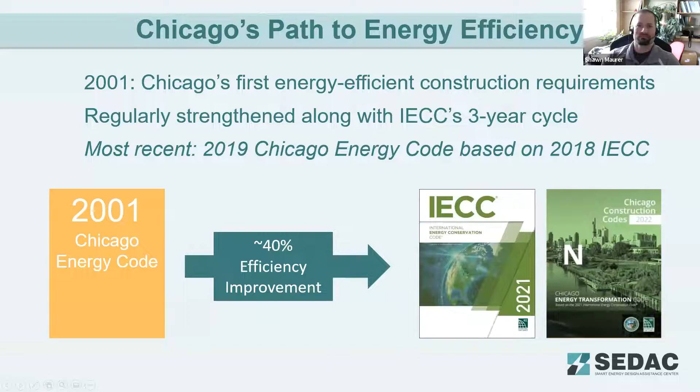The advancements of the codes help support Chicago's energy and climate commitments. It follows the Climate Crisis Resolution from February 2022 and the Chicago Climate Action Plan. The goal for the state is to reduce overall carbon footprint and emissions by 62% from 2017 levels. Energy codes are a good way to help ensure that new buildings constructed and existing buildings renovated are reducing their energy consumption as much as possible.

So why the update from the Chicago Energy Conservation Code, as it was in the last cycle, to now the Transformation Code? The key thing is that Chicago is looking forward towards electrification and application of renewable energy technologies to buildings to help offset carbon emissions. So energy efficiency plus clean energy equals energy transformation, and that's why in the current code cycle it's been renamed the Chicago Energy Transformation Code.

Here at SEDAC, we like to recommend to everyone that first you've got to conserve, then you apply renewables to your projects. If you don't conserve energy first, you're going to spend a lot more money on renewables and consume more resources to provide those renewables to buildings. So conserve first, get your energy consumption as low as possible, and then start applying renewable energy technologies to those facilities.

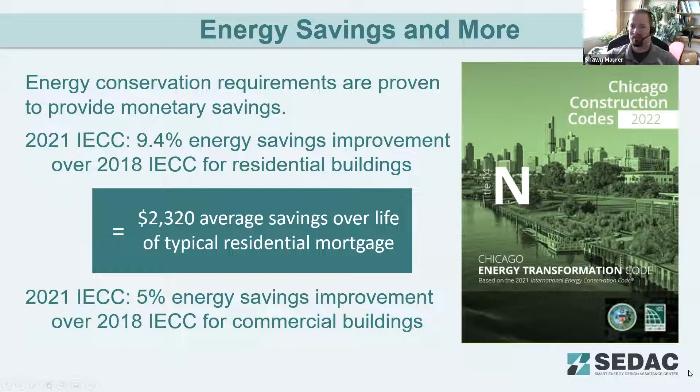Before we move on to talk about the commercial provisions, we have a quick Q&A poll. Our first question: what is the target carbon reduction from 2017 levels in the Chicago Climate Action Plan? Is it 41%, 55%, 62%, or 74%? And then, how much has the Chicago Energy Code improved since the 2001 Chicago Energy Code? Is it about 20%, 40%, 50%, or 60%?

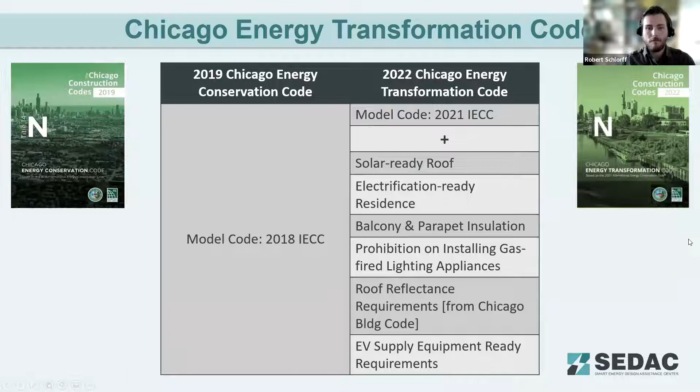A little bit more about the model code: the 2021 International Energy Conservation Code is being adopted as the model code without any weakening amendments. There are additional requirements, as I just mentioned, as well as a couple additional pathways.

First, there are a couple additional compliance pathways allowed within the Chicago Transformation Code: Passive House Institute certification, as well as National Green Building Standards certification. If your project complies and receives certification through either of those entities, you have no other additional requirements through the Chicago Energy Transformation Code.

Your building complies. As mentioned earlier, there is a ban on new gas lighting specifically - it does not have any effect on existing gas lighting, but is a ban on any new gas lighting. The reason is that gas-fired lighting fixtures produce a significant amount of waste heat, as well as exhaust fumes and direct emissions, so we want to not allow those devices to be installed anymore.

There are also additional thermal break requirements for balconies and parapets, electrification ready requirements, and solar ready roof requirements that should make new buildings within Chicago more prepared for the transition to renewable energy. As Shawn was mentioning earlier, as we continue to push the national grid towards more renewable energy, these requirements should help prepare new buildings within the Chicago area for that transition, make it easier, and make it more cost effective in the future.

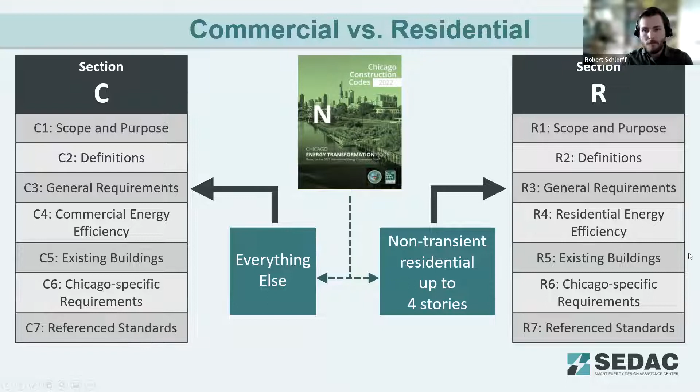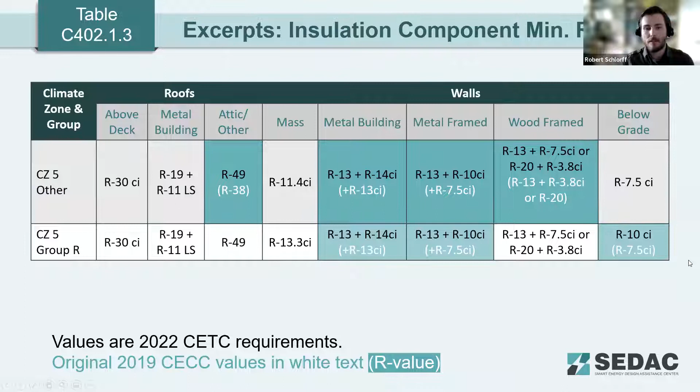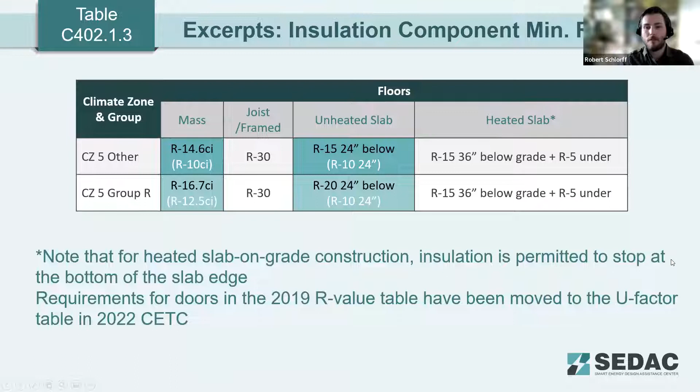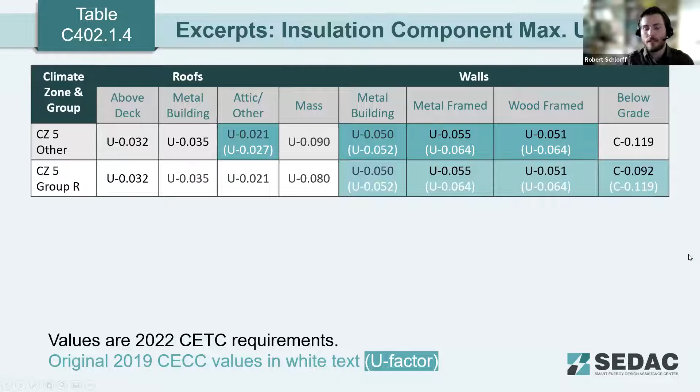Moving on to the U factor tables, again we've pulled out the requirements for roofs and walls in climate zone 5. And again, we have improvements in these U factor requirements that mirror the improvements within the R value table. Same noting system goes here, where green highlights represent where values have been improved, and the white text represents the original 2019 Conservation Code values.

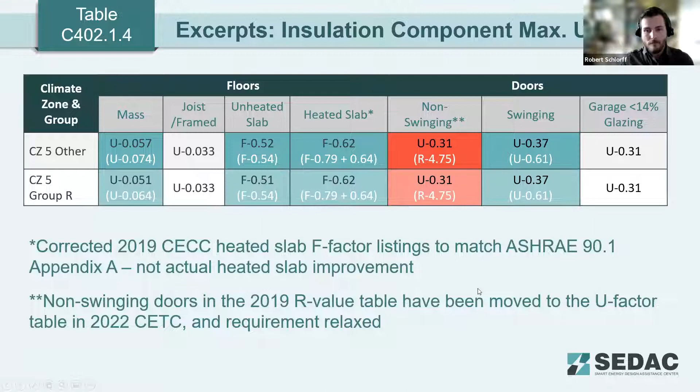So moving on to balconies and parapets. As I mentioned earlier, there has been a new requirement added onto the model code for the Chicago Transformation Code to limit thermal bridging through balconies and parapets. This applies to new construction with any exterior balconies or parapets that interrupt the building thermal envelope.

Now these can be dealt with in two ways. The first way is to install continuous insulation around either the balcony or the parapet. The R value of that continuous insulation must be equal to the adjacent wall that it is interrupting. If the balcony interrupts more than one type of exterior wall with different R values or insulation levels, the balcony continuous insulation must equal the higher R value of the adjacent wall being interrupted.

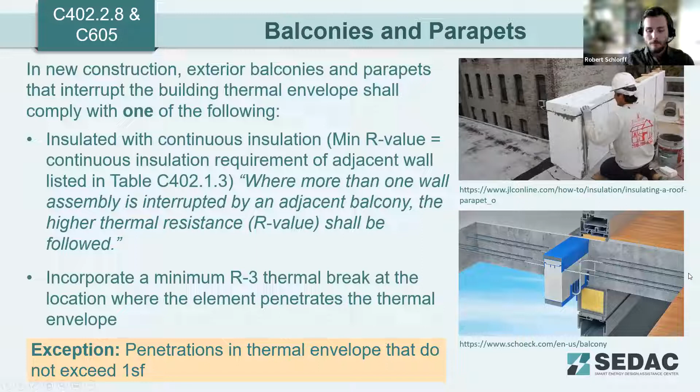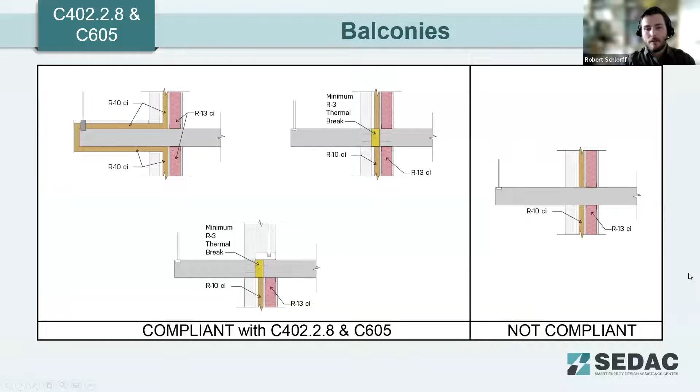Here we've drawn and isolated some balcony details that show compliant details on the left and a non-compliant detail on the right. As you can see, it needs to be either continuously wrapped in insulation, as the option in the upper left, or applying a thermal break, as in the other two compliant options there.

We'd like to point out that even in a continuously insulated parapet, there's a risk of condensation within that parapet assembly. This is primarily due to improper or faulty air sealing details at the bottom of the parapet that would allow interior conditioned air to infiltrate that assembly.

Rise up into that parapet and cause condensation. So there are a couple ways you might be able to deal with that. You can either design or carefully consider your air sealing details at the base of the parapet to make sure that air intrusion into that assembly is not an issue.

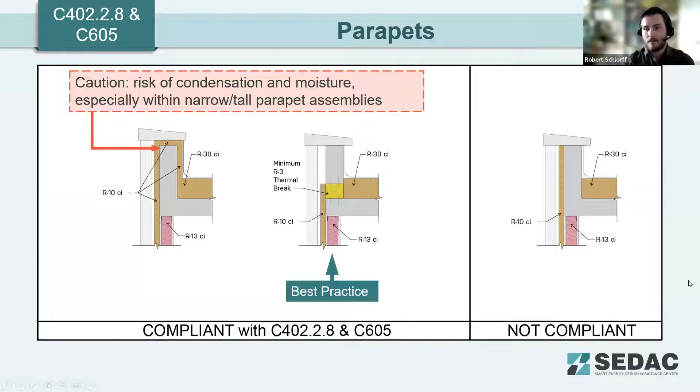Although there's a good argument that if you're going to that much trouble trying to keep air from entering that parapet assembly, you might as well just install and detail a thermal break. So there are two options there, but we want to point out there could be a risk of condensation, particularly with narrow and tall parapet assemblies where there's just not quite enough insulation to prevent condensation within that assembly when interior air can get in.

Moving on to thermal resistance of cold formed steel assemblies. The Chicago Energy Transformation Code has removed the effective R-values for steel stud wall assemblies table that is included in the 2021 Energy Conservation Code. This has been replaced with the American Iron and Steel Institute's S250 formulas for cold formed steel assemblies.

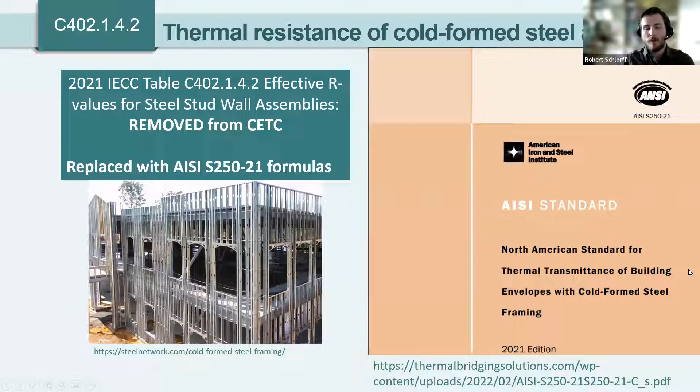How that works is the U-factors of exterior walls using cold formed steel members must be determined in accordance with S250 formulas. Any framing spacing can be used when continuous insulation satisfies the U-factor max with no cavity insulation. So if you're satisfying the minimum U-factor for your exterior walls with no cavity insulation, you don't need to worry about S250 formulas.

If your exterior walls are steel framed at 24 inches on center or 16 inches on center, you move to the next lowest spacing factors, as shown in that graphic to the right. For greater spacing than 24 or 16 inches on center, you'd use the S250 formulas without any modifications. And if you have a wall assembly using steel members that are non-standard, you'd use the S250 formula options for non-standard framing members.

The main reason behind this shift is to really drive home the impact of thermal bridging through steel stud assemblies. It's been shown over and over again, especially if you've seen thermal images of a steel stud assembly, that thermal bridging is a significant problem with that method of construction.

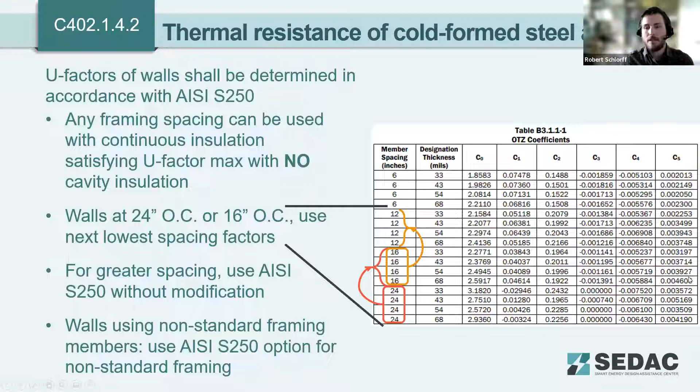These requirements are trying to limit the impact of thermal bridging through your exterior assemblies as much as possible. The hope is that this pushes a bit more toward continuous insulation, as the code value tables we showed previously are also doing, or pushes toward more advanced framing techniques that limit thermal bridging in other ways. But the main component is that we're trying to eliminate thermal bridging as much as possible through the assembly.

Moving on to fenestration, maximum U-factor, and solar heat gain coefficient requirements. There's not much difference here between the Chicago Transformation Code and the updated 2021 IECC code. They're pretty much in alignment. There's a little bit of improvement in the actual required U-factor and solar heat gain coefficient values.

But the main difference to keep in mind is that solar heat gain coefficient is no longer determined by orientation of that fenestration. It's now determined by whether or not that fenestration is fixed or operable. This requirement sacrifices some of the potential for cost-benefit trade-offs by using lower performing windows on the north side of a building, but it better accounts for the fact that operable fenestration generally has a much more difficult time with air sealing and being thermally broken than non-operable fenestration.

So the difference here is saying that if you have operable fenestration, your solar heat gain coefficient is going to be lower, because that operable window assembly is a little bit poorer in performance than a fixed window or fixed fenestration would be.

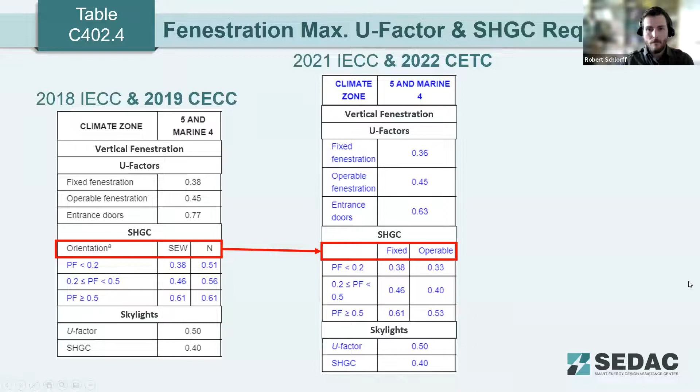As with the IECC, there is a pathway that would allow you to increase the amount of vertical fenestration on your building. Vertical fenestration can be increased to a maximum of 40% of the above grade wall area when the following requirements are met. For buildings with no more than 2 stories above grade, at least 50% of the net floor area has to be within a daylight zone. For buildings 3 stories or more above grade, at least 25% of the net floor area must be within a daylight zone. For both, daylight responsive controls must be installed within the daylight zone.

Lastly, visible transmittance of vertical fenestration shall not be less than 1.1 times the solar heat gain coefficient. There is an exception, but it only applies to that fourth item about visible transmittance, and that exception applies to any fenestration outside the scope of NFRC 200. NFRC 200 is the standard for determining solar heat gain coefficient for windows, doors, skylights, and curtain walls. Any fenestration that does not use flat glazing cannot use NFRC 200 methods for determining solar heat gain coefficients. So essentially, fenestration such as domes, solar tubes, or other contoured glazing does not need to meet that fourth item visible transmittance requirement.

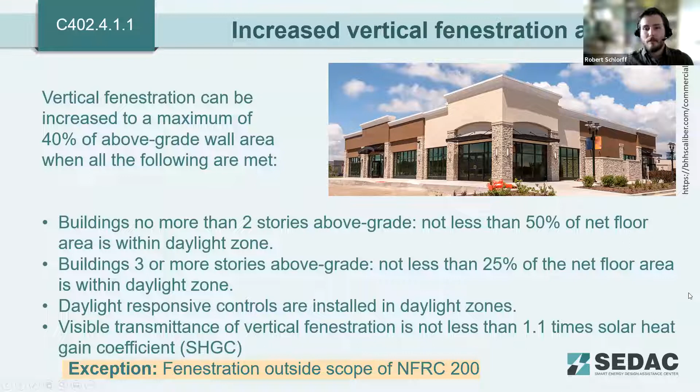One more requirement here for fenestration. This may be familiar to some of you who know the state energy code, and it's also a proposed amendment for the upcoming state energy code. This requirement is for buildings with more east and west fenestration than north-south fenestration. The essential idea is that the glazing on the east and west facades of such a building will have a slight penalty, meaning those windows need to be higher performing than the ones on the north and south sides.

The reason for this is that we want to do our best to compensate for the high heat gains we see on the east and west facades of a building. Especially morning and afternoon sunlight can be pretty harsh and hot depending on the time of year. So if a building has a significant amount of east and west glazing, this requirement is trying to account for that and make sure east and west glazing is a little higher performing, so you don't suffer from unwanted heat gains.

To determine if your project needs adjusted solar heat gain coefficients in this way, you follow the given formula: take the area of the west facade windows times the solar heat gain coefficient of the west facade windows, and that must be less than or equal to the total area of the fenestration around the building times the solar heat gain coefficient given in the code, divided by 5. What this formula breaks down to is essentially that east and west fenestration on a building would need to be about 20% improved over the base code minimum values for solar heat gain coefficient performance.

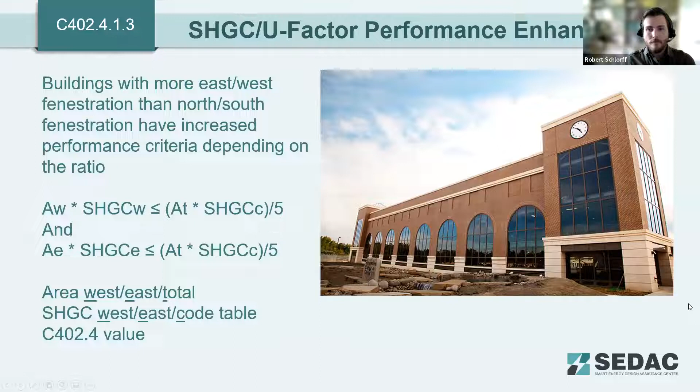Question 1: only balconies are required to have thermal breaks in the 2022 Chicago Energy Transformation Code, while parapets are optional. True or false? Question 2: how much does the east-west area weighted solar heat gain coefficient have to be reduced below the total code required area weighted solar heat gain coefficient to comply with the Transformation Code's Fenestration Performance Amendment?

We've had a few questions come in. Is there an ASHRAE compliance path for the Transformation Code? Yes, that's part of the 2021 model code. That hasn't been removed by the Chicago Amendment, so you can follow ASHRAE, or they've added in the Passive House and Green Building Standards compliance paths.

Since new buildings need to be solar ready due to the Transformation Code, what defines a building being solar ready? We'll get to that, yep, we are just about to get there.

Okay, looks like pretty much everybody has answered the poll here. I'm going to go ahead and end it. So it looks like pretty much everybody got the first question correct: balconies and parapets are both required to have thermal breaks or continuous insulation within the 2022 transformation code. And it looks like pretty much everybody got the second question right as well, that the east and west glazing needs to have about a 20% improvement over the base code minimum requirements.

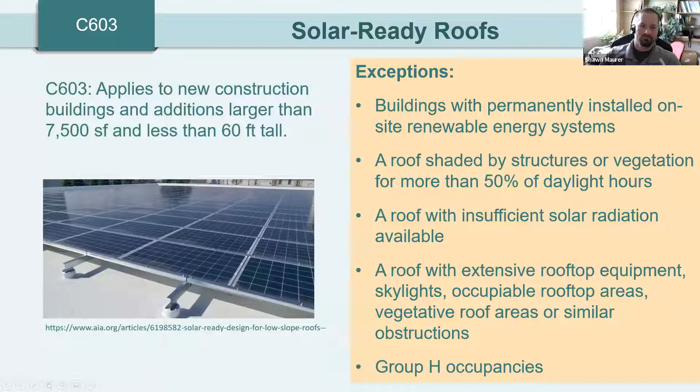So looking at the solar ready zone areas, how do we define a solar ready zone? It's the available roof area on a horizontally projected gross roof area, less any areas covered by other rooftop equipment like skylights, helipads, rooftop equipment, vegetative roof areas, things like that.

And have mandatory access or setback areas as required by Section 1204 of the Chicago Fire Prevention Code. So 40% of the available roof area must be made solar ready.

Looking at either a single large area of the roof or a number of separate subzones that total up to that 40% available area. Again, that narrowest dimension between subzones should not be less than 5 feet. That provides your access pathways, things like that.

If your available roof area is less than 2,000 square feet, again, you're not going to have an adequate amount of solar installed on that roof to offset building loads and be cost effective. And so there is an exception for roofs that have minimal available area.

Again, things that are going to be kind of limiting that available rooftop area: skylights, rooftop parking or helipads, occupiable vegetative roofs, rooftop gardens, mandatory access or setback areas.

And what we want to see for that solar readiness is that area of the roof is going to be indicated on the plans as these are the solar ready zones. This is how you're going to indicate your code compliance with the transformation code.

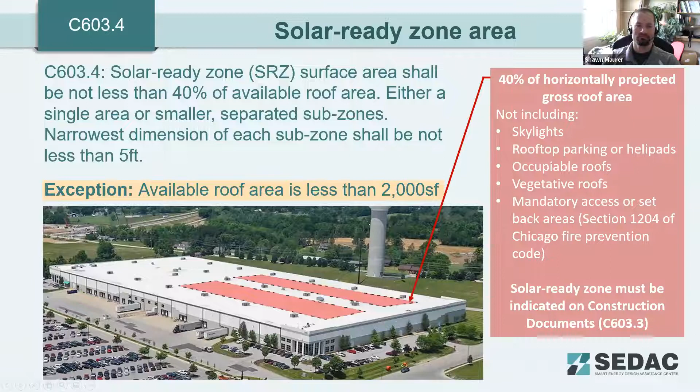Some additional requirements for solar ready roofs. Solar ready zone shall be free from obstructions such as pipes, vents, HVAC equipment, skylights, roof mounted equipment. You want a clear roof space where it's able to just install the panels quickly. It's readily available. That's why it's considered solar ready.

Rooftop loads must be documented and designed for the additional dead load of the panels on the building. So adding an additional 5 pounds per square foot or more in dead load allowance to the construction, again, makes that roof structurally prepared to accept those panels and have them installed.

And then in the construction documents, you'll have to indicate pathways for future conduit or piping, or design in empty conduit or whatever, so that those areas are ready for solar panels to be installed and have all the electrical components wired in and connected properly. And they don't have to have redesign of the building, moving things around in order to install that equipment.

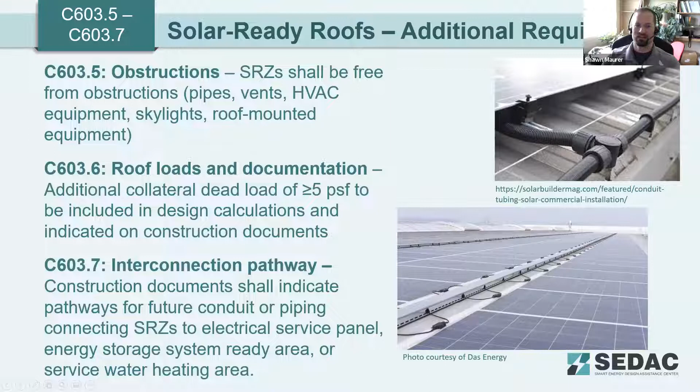We want these solar ready so that they're easy to install. It's minimizing that future cost of installing this equipment when the building occupants and owners are ready to install these panels.

As far as inside the building, if you're going to have energy storage systems for your structure, you're going to need an energy storage system ready area, minimum of 2 foot by 4 foot clear floor area for future energy storage. Again, fire prevention code is going to have some impact there, so refer to the appropriate sections as far as where to locate those energy storage systems.

For electrical service, you need to reserve space to put in the panels, circuitry, switch gears, all that related to using those solar panels. So you need to reserve space for the dual pole breakers for future solar system and energy storage systems, and label them appropriately so that, say you add some more equipment to the building, those empty slots aren't taken up and now you're not solar ready anymore.

And then a permanent certificate needs to be installed indicating how the building has been made solar ready and documenting, near the electrical panel or other approved location, these things have been installed to make the building ready for solar applications.

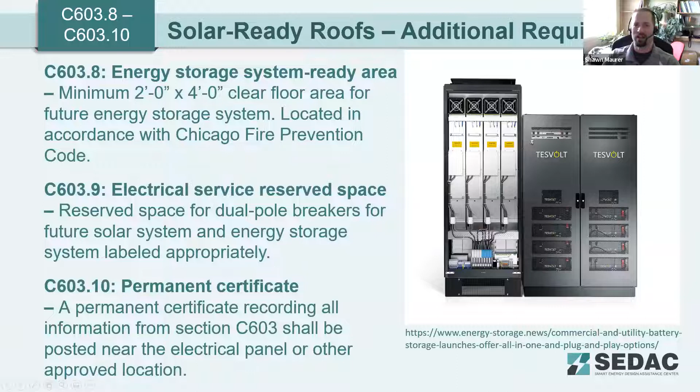Moving into electrification ready residences in commercial buildings. So when looking at group R2 occupancy dwelling units, rooms and spaces within with domestic cooking appliances shared by the occupants of more than one dwelling unit. This applies to new construction and if you're changing occupancy.

It does not apply to alterations, additions, repairs, or changes where the occupancy is staying the same. So if it's already a residential space that was not previously solar ready, if you do an alteration in that space, you don't have to then make it solar ready. We recommend it, but you don't have to. There's additional costs and stuff there.

If the occupancy is changing from another occupancy class to a residential classification, then you do have to do these electrification readiness preparations.

Spare circuits have to be installed, with individual branch circuits labeled 'spare' at both ends of unused conductors, and electrically isolated. Space shall be reserved in the electrical panel where the branch circuit originates for installation of overcurrent devices. The capacity of circuits required by C406 must be included in load calculations for the original installation. So if you have gas equipment in place but you're installing this electrification-ready infrastructure, you have to make sure the panel itself is set up to handle those additional electric loads when the conversion is eventually made.

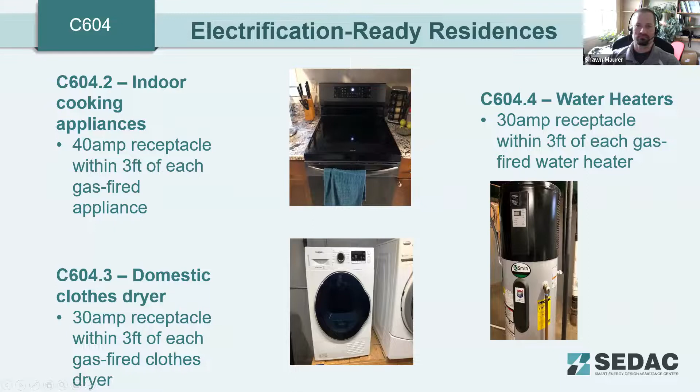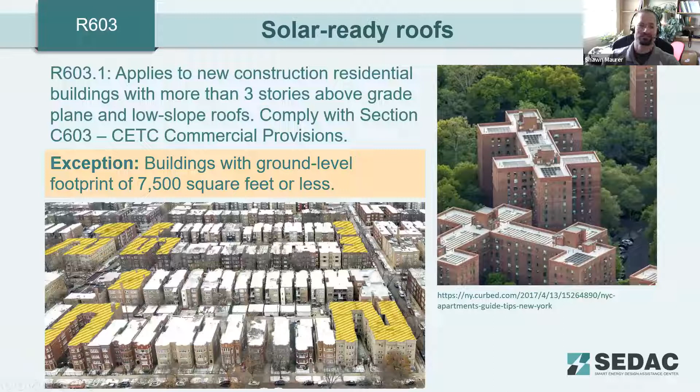We touched on this earlier—gas lighting, new gas lighting is prohibited. As noted, gas fixtures create a lot of excess waste heat, and there are fumes that come off of those, wasting a lot of energy to use gas for lighting. Gas lighting itself, while it has a nice ambience, isn't really great quality lighting. So banning those from future installation ensures we're going with higher efficiency lighting and better quality lighting.

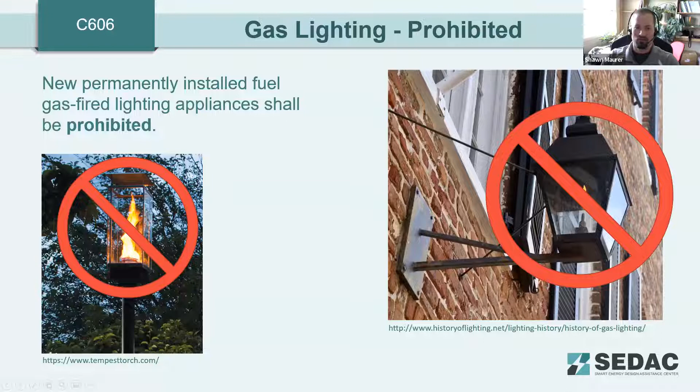So that we're using it for the purpose it's intended for—outdoor illumination. At the roof, looking at solar roof reflectance requirements, roof coverings shall comply with section 1515 of the Chicago Building Code. That section states low slope roofs should have an aged reflectance of 0.72, while other roofs need an aged reflectance of 0.15 or greater.

Exceptions to these reflectance requirements include areas with walking surfaces for occupiable roofs, vegetative roofs and roof gardens, landscaped roofs, and places with solar equipment—photovoltaic and solar thermal equipment. These requirements help offset the heat island effect for roofing, which is why Chicago brought them back into the IECC.

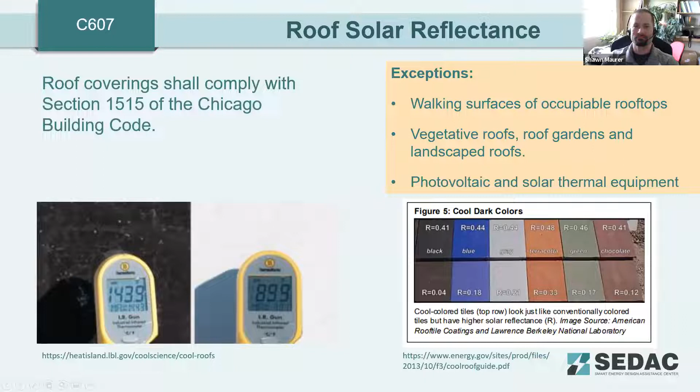Looking at the specific low slope roof requirements: an initial reflectance value of 0.72, or a 3-year installed reflectance value of 0.5 or greater. Exceptions include where more than 50% of the roof area is vegetative roof or roof garden—the remaining roof area is allowed a 3-year installed reflectance of 0.3 or greater instead of 0.5.

Roofs with a minimum of 15 pounds per square foot of ballast installed over the entire roof area shall have that minimum 0.3 reflectance, the 3-year aged reflectance. So there are some allowances for different roofing types, allowing that reflectance to be adjusted downward when there are other means of offsetting the heat island effect from flat roof areas.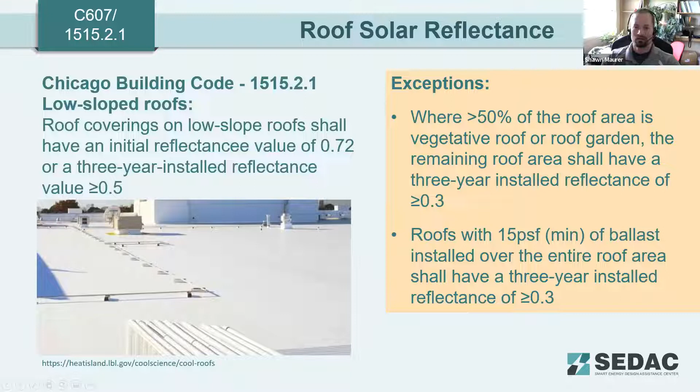Looking at sloped roofs and residential type structures, roof coverings other than low slope roofs shall have an initial reflectance value of 0.15 or greater. Roof coverings with a slope greater than 5-in-12, at 41% slope, are excepted in historic buildings—if you can't find an adequate reflectance material but want to maintain that historic appearance for those structures, they are exempted from these requirements as well.

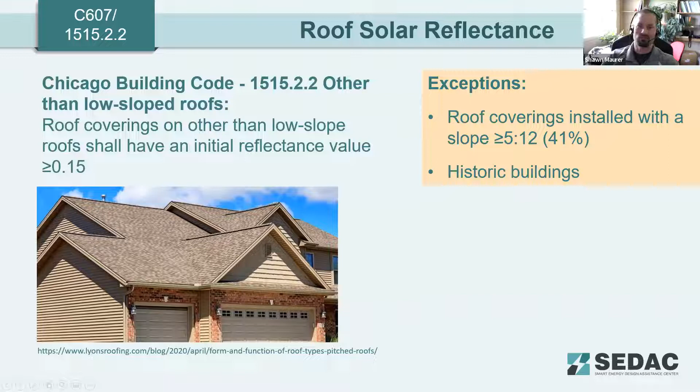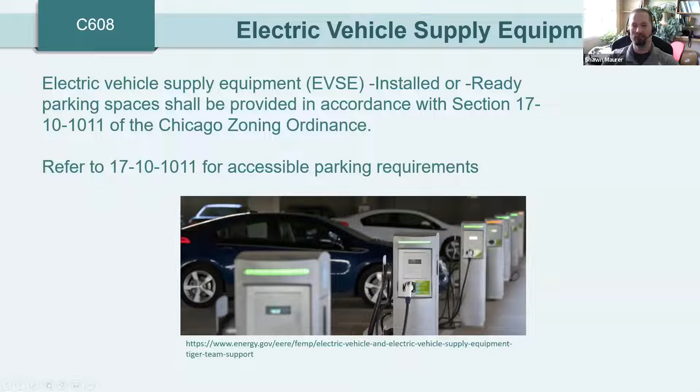Electric vehicle supply equipment is required to be installed or ready at parking spaces in accordance with Chicago zoning ordinance 1011. This states that for 20% of spaces at new construction facilities, with a minimum of at least one space, need to be EVSE ready or installed. Multi-unit residential with 5 or more units on site needs to meet that 20% - 20% of 5 is 1, so you need at least one space or more that are EVSE ready. New construction for uses other than residential with 30 or more parking spaces need to have at least 20% of the spaces EVSE ready or installed.

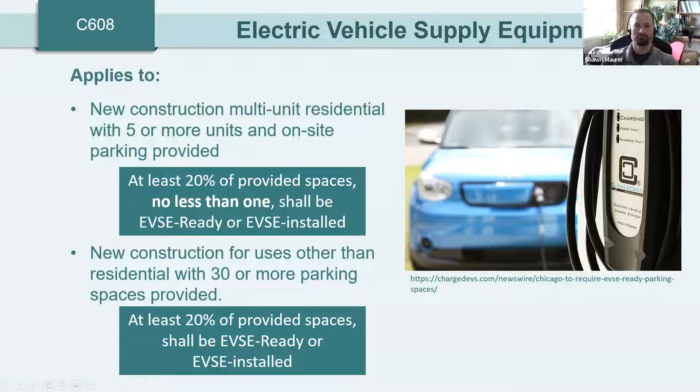We've had a few questions in the past about whether this applies to different types of spaces regarding passenger cars, tractor trailers, box trucks, fleet vehicles, things like that. The type of space isn't specified in that zoning ordinance, so you count up the total number of spaces regardless of their usage. 20% of those need to be EVSE ready or EVSE installed.

Lighting for plant growth - many people are probably familiar with this addition. It's proposed for the 2021 IECC, but makes the energy efficacy of plant lighting a little bit more stringent than what's in the IECC. It states all permanently installed luminaires shall have a photon efficiency of not less than 1.7 micromoles per joule for greenhouses and 2.2 micromoles per joule for all other indoor growing spaces.

There is an exception here for buildings with no more than 40 kilowatts of aggregate horticultural lighting and cannabis facilities subject to the Illinois codes there. So again, growing facilities - that supplemental lighting to grow plants is largely energy intensive. Making that as efficient as possible so that the intended purpose of that light, delivering photons to the plants for their growth, is what that lighting is serving.

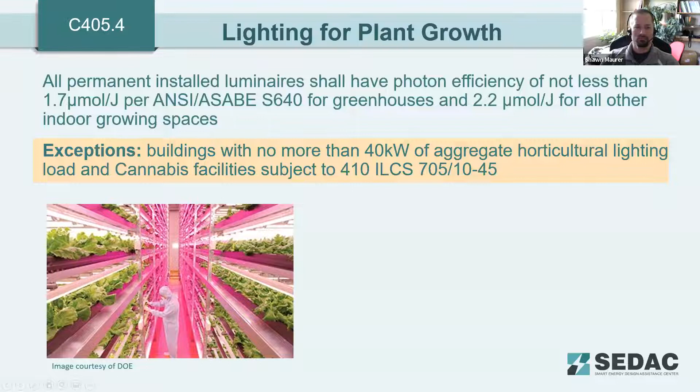I believe that brings us up to our next poll question, so we'll go ahead and launch that. Our first question: solar ready roofs are triggered by what roof area in section 603? Is it 2,000 square feet, 4,000 square feet, 7,500 square feet, or 10,000 square feet? And then, for the 2022 transformation code, do electrification requirements ban gas appliances? True or false?

Let's see, we had something come into the Q&A. Will the EVSE requirement apply to public parking in retail uses? I don't recall that there's an exception to building use classification as far as parking spaces, so I would believe that EVSE ready still needs to be there for retail uses as well. I believe that's correct, yes.

We did get a question in the chat - it looks like the electrical service has to be sized for a multi-unit building. I'm guessing that's going back to the electrification ready question about the required electrification ready circuits being included within the building's electrical service load. If I'm understanding that question correctly, yes - if it was a multi-unit building, the electrification ready circuits still have to be included within the base design load for the building. Doesn't matter if it's a multi-unit building or not.

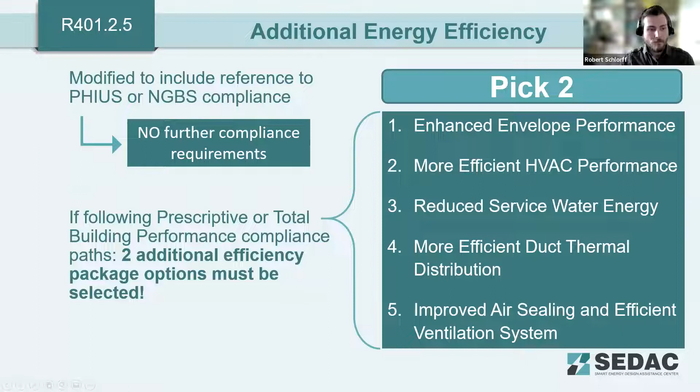Let's keep moving on. Again, we've pulled out the table — this is the maximum assembly U factor table, Table R402.1.2. The top row shows the original 2019 Chicago Energy Conservation Code values, and the row below shows the new updated 2022 Chicago Energy Transformation Code requirements. We've highlighted where those requirements have changed since the last code cycle — the green highlights with bold lettering show increased U factor requirements. We've also highlighted one of the only instances where the Chicago code adds requirements beyond the 2021 IECC: fenestration solar heat gain coefficient requirements within climate zone 5.

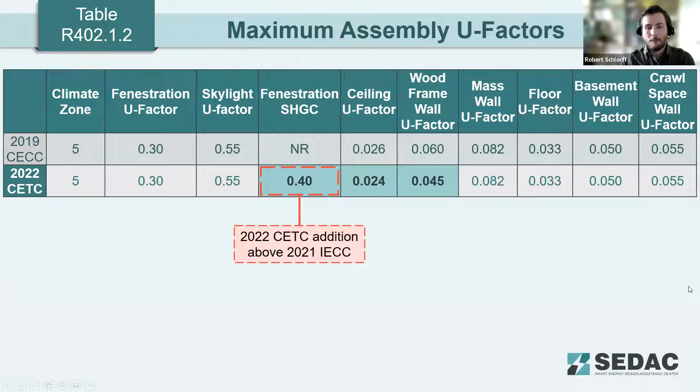Moving on to the R value table — one change to cover is that the 2021 IECC changed the order of these two tables, putting the U factor table before the R value table. The Chicago Energy Transformation Code has kept that arrangement. The main reason is that the U factor table allows a little more flexibility and innovation using non-traditional assemblies, so putting it first encourages innovation and new designs, with the R value table second. There's no real change in requirements, just a shift in which table is shown first. You can still comply with either table — only the order has changed.

Another note here, more about building science, is that there's a note within the code that the assembly of R20 cavity plus 5 continuous insulation carries a risk of condensation. This was determined based on Passive House Institute modeling and testing, and Passive House Institute has also proposed a state amendment to include this note within the state code. The aim is to ensure the ratio of continuous to cavity insulation shall not be less than 0.3. If you want to go lower than that ratio, you really should do a hygrothermal analysis, especially in climate zone 5.

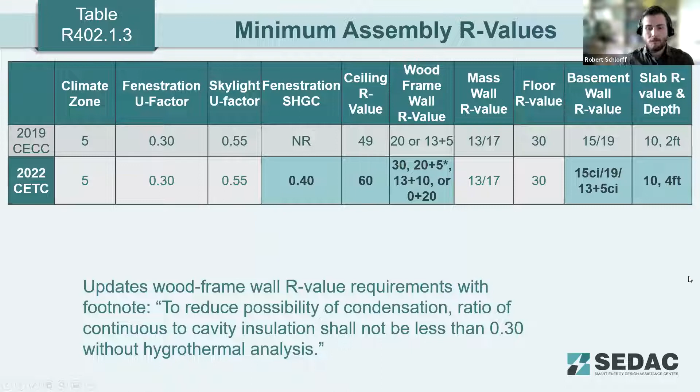Moving on to specific roof insulation requirements, this is section R402.2.2. Real quick, I'll talk about the 2021 IECC and how it differs from the Chicago Energy Transformation Code, because there's a bit of a difference here. The 2021 IECC sets a minimum insulation requirement for ceilings without attics, with an allowance for R30 to be installed within vaulted or narrow frame ceiling spaces where the full required insulation value can't fit due to the design of the assembly.

That's limited to 500 square feet or 20% of the ceiling. So those requirements are in the 2021 IECC. In the 2022 Chicago Energy Transformation Code, that allowance does not exist, so that means all framed ceiling assemblies must have R60 insulation as a minimum. This either requires thicker framing or pushes designs towards more continuous insulation.

As we've said a couple times today, the codes are really driving more and more towards continuous insulation. There are a lot of building science benefits to getting that insulation plane on the outside of your framing. It prevents thermal bridging, which is another thing we've talked about. This is another instance of the code doubling down on that idea of pushing towards more continuous insulation.

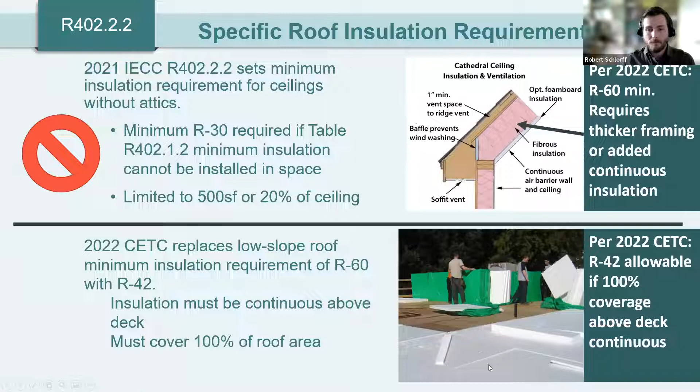Talking about steel framed assemblies, as I mentioned, thermal bridging is something the code is really trying to target and eliminate or reduce as much as possible. Very similar to the commercial requirements we mentioned earlier, the transformation code requires residential steel framed assemblies to also determine their U factor of exterior assemblies using the S250 formulas. These requirements are very similar to the commercial requirements above, pretty much the exact same.

All exterior continuous insulation can be any framing distance, so if you're using only continuous insulation, your framing can be whatever spacing on center you want. If you're spacing your steel framing at 16 or 24 inches on center, you would use the next lower framing member spacing input within the S250 calculations. As we showed for the commercial requirements, you just drop that spacing measure down in the table and use those next spacing down requirements rather than sticking with 16 or 24.

Larger spacings than 16 or 24 must use the S250 formulas to calculate without any other modifications—you just follow the S250 formulas if you have larger spacings. Again, for custom framing members or non-typical, non-C-shaped members, you would follow the S250 formulas for those non-standard or custom framing members.

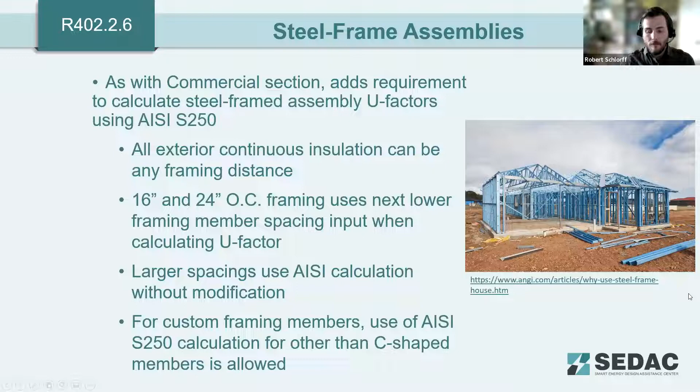A little bit more about steel framed assemblies: table R402.2.6 from the 2021 IECC is included within the transformation code as well. They've removed references to the type of assembly, and they only show requirements for 16 inches and 24 inches on center framing with greater than 30% continuous insulation to cavity insulation ratio. That goes back to the warning from the Passive House Institute. Although this is talking specifically about steel framed assemblies, that ratio of insulation still applies in this instance as well. I'd say the risk of condensation is the same no matter what type of studs you're using, but the effects of thermal bridging will be much greater with a steel stud assembly over a wood assembly. Something to keep in mind.

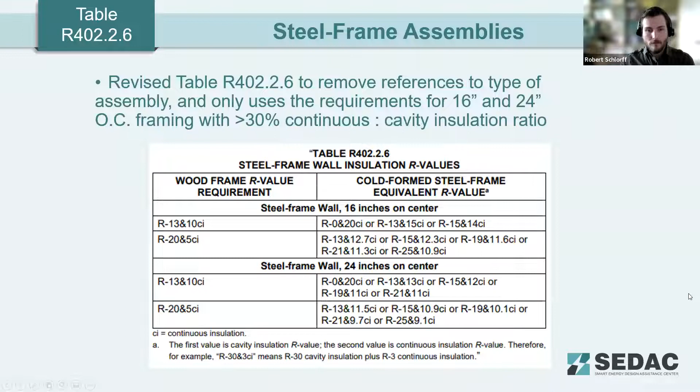Again, talking about parapets and balconies within residential buildings: the commercial requirement to either continuously wrap those assemblies with insulation or provide a minimum R3 thermal break also applies to residential buildings. This refers you back to R605, and the exception for structural elements applies just the same in residential buildings. That's a 1 square foot exception for structural elements—structural beams, post tension cables, anything that needs to extend through the thermal envelope out to support the balcony. Each of those openings can be a maximum of 1 square foot.

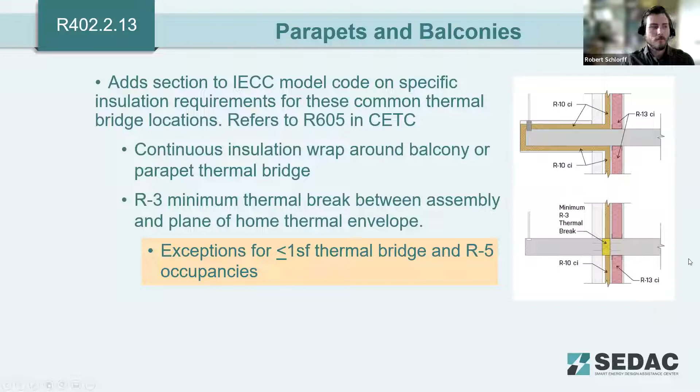Okay, a little bit here about duct leakage exceptions that have been added. These exceptions have been added for different tests: the rough-in test, the post-construction test, and the testing of ducts within thermal envelopes. The new pieces here are the exceptions that provide a minimum airflow for very small duct systems, systems that the typical code language just doesn't apply to, or isn't cost effective to enforce full requirements on.

If your duct system size is below these thresholds given by these exceptions, and if you can only achieve 60 CFM of leakage or less, then it complies with the Chicago Energy Transformation Code. These exceptions account for small or unconventional systems that may not align with the typical code language or typical duct systems. Again, if a duct system can achieve only 60 CFM of leakage or less and meets these size limitations, then it complies with the transformation code.

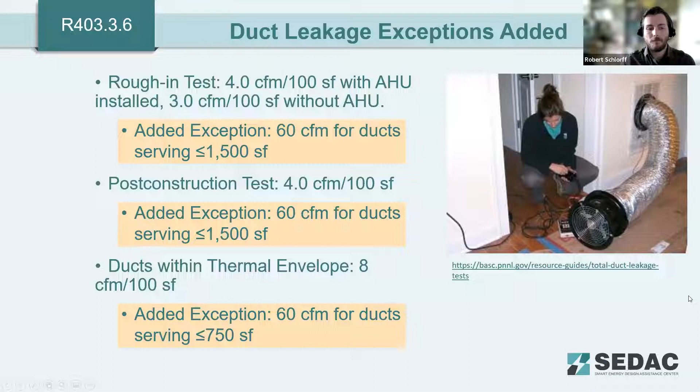Moving on to whole house ventilation fan efficacy. The Chicago Energy Transformation Code includes a section for range hoods. If you've looked at the 2021 IECC first printing, or maybe even the second printing, this section on range hoods is not in the 2021 IECC. The Chicago Energy Transformation Code has put the range hood requirements back in, but the IECC has also done that. The most recent errata for the 2021 IECC also adds this range hood category and requirements back into this table. So the Chicago Energy Transformation Code and the 2021 IECC are in alignment on this requirement.

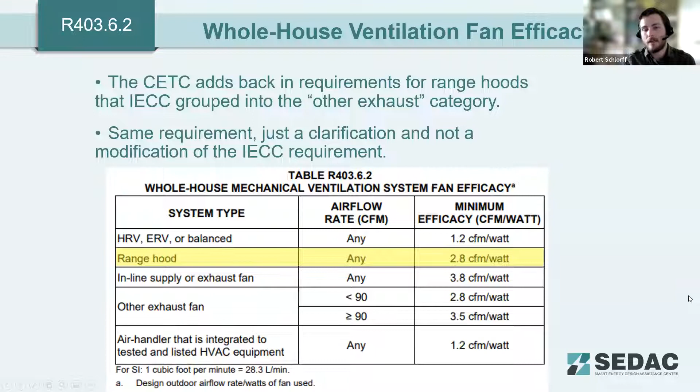It was a mistake made in the original printing of the 2021 IECC. Both codes are in line, and both have specific requirements for range hoods that differ from the other system types listed in the table. HRVs, ERVs, or balanced systems have their own requirements, as well as inline supply or exhaust fan systems. Any other exhaust fans, either greater than or less than 90 CFM, have their own requirements too. Listed at the bottom, air handlers integrated to tested and listed HVAC equipment also have their own requirements listed in the table. So just keep in mind that both the Chicago Energy Transformation Code and the IECC are in alignment on this requirement - you just need to make sure you're looking at the most recent errata for the 2021 IECC.

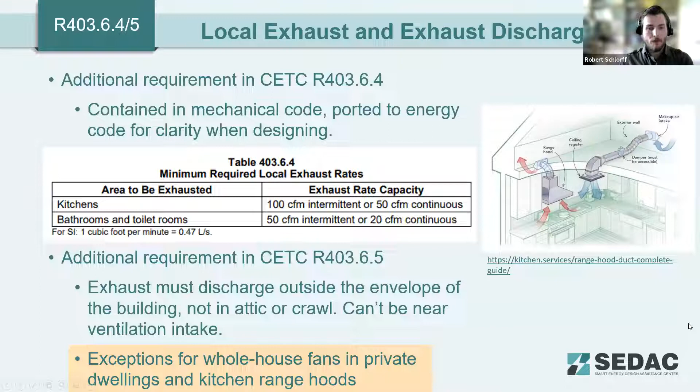Moving on to ventilation design - a few more details on ventilation design within residential buildings in the Chicago Energy Transformation Code. Required ventilation rates can be reduced by 30% if supply air is ducted to all of the bedrooms within the unit and at least one of the living room, dining room, or kitchen. For this to apply, your ventilation system must be a balanced supply and exhaust system. So if you would like to lower your ventilation requirements within the unit, one way to do that is to make sure supply air is ducted directly to all of the bedrooms and at least one of the other living spaces - the living room, dining room, or kitchen.

The intent behind this is to provide conditioned air where it is needed most, where there are the most occupants or where occupants may spend the most time. So providing bedrooms where people are sleeping with fresh air, and fresh air into at least one other gathering space. We're trying to provide air where people are, not just through the building to meet code, but directly to where it's needed by the occupants.

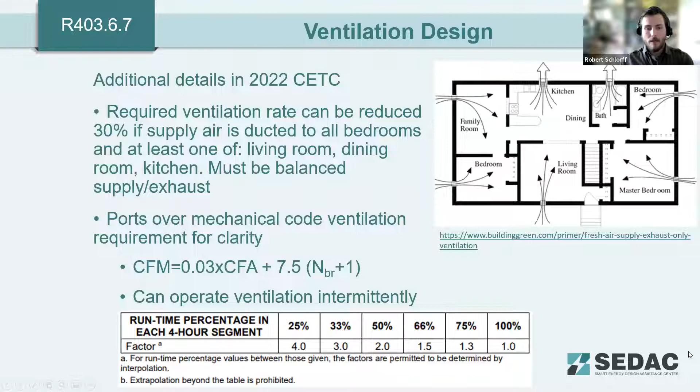Continuing on, how do we demonstrate compliance for our projects within the Chicago Energy Transformation Code? First, we'll continue on with residential buildings. The first thing to understand is the definition of a residential building within the code.

The code defines a residential building as a detached one-family dwelling, or any building that has 4 or fewer stories above grade plane and contains multiple units in which occupants reside on a primarily permanent basis. So a residential building within the Chicago Energy Transformation Code is essentially a building that is 4 stories or fewer with non-transient residential units within it.

A key point to remember is that if a residential building, one that's 4 stories or less, contains non-residential uses - a mixed use building with both commercial and residential portions - a commercial compliance statement must also be submitted with your project documentation.

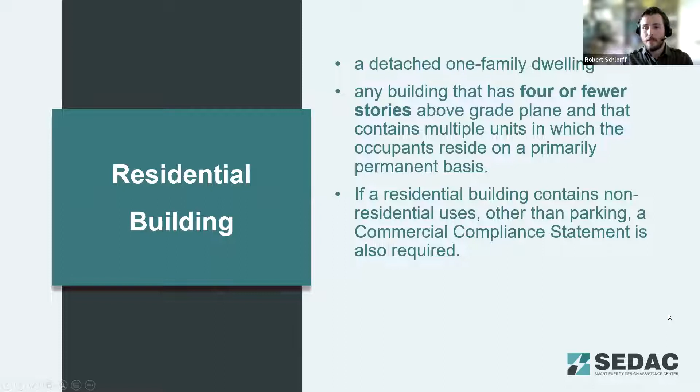A residential compliance statement must be filled out by the licensed professional for the project, so a licensed architect or engineer, and submitted with every application to construct or alter a residential building. To touch more on the residential building definition, that includes anything ranging from a townhouse, row house, apartment house, convent, monastery, fraternity, sorority house, or student dormitory, or a rooming house.

So again, that's 4 stories or less with non-transient residential use.

Looking at the compliance statement, after the initial section at the top, the lower section is the compliance method. We've pulled those choices over to the left. When filling out this form, you simply check which compliance method your project is aiming to follow, either through REScheck, which is recommended because it makes the verification process easier and quicker.

You can also follow the prescriptive path, total building performance path, energy rating index, or as mentioned previously, Passive House Institute certification or National Green Building Standards certification. All of those are applicable compliance methods for residential compliance to the Chicago Energy Transformation Code.

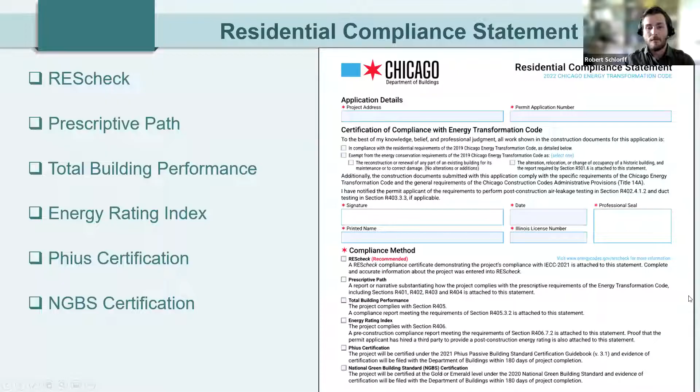Moving on to commercial buildings - as mentioned at the beginning of the presentation, the definition of a commercial building within the Chicago Energy Transformation Code is anything that is not a residential building. So anything greater than 4 stories, or anything less than 4 stories that doesn't contain non-transient residential use.

If a mixed occupancy building contains both non-residential and residential occupancy and is up to 4 stories, you must submit both a residential and commercial compliance form. If you have a mixed-use building greater than 4 stories, that building is a commercial building, so you would only have to submit a commercial compliance form.

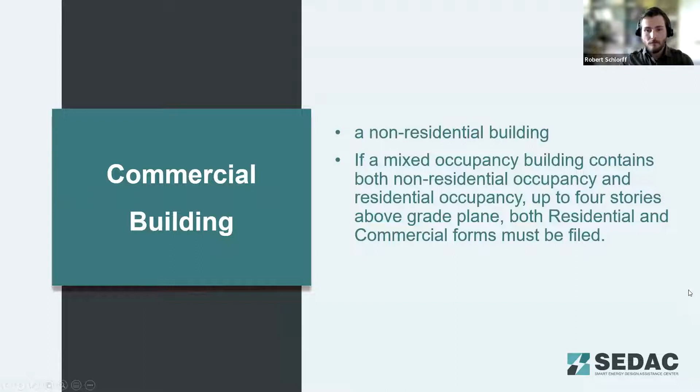And here's what the commercial compliance form looks like. Again, we've pulled out the different compliance methods there towards the left. There are a few more options here for the commercial side than the residential side.

So we have COMcheck, the IECC prescriptive path, the IECC total building performance method. And then you do have your options, as somebody asked earlier, to follow ASHRAE 90.1 prescriptive path, energy cost budget path, or performance rating method.

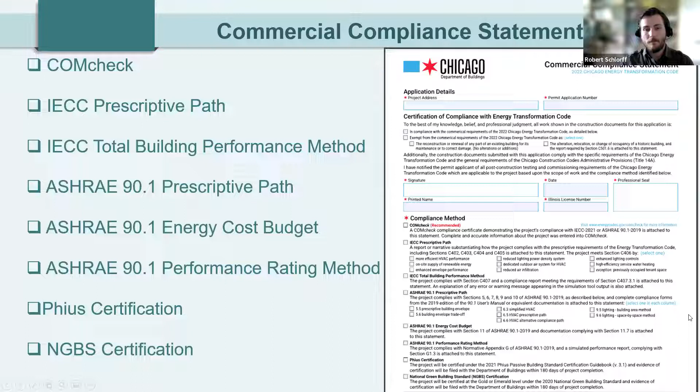And then again, you have your Passive House Institute and National Green Building Standards certifications as well. Just to talk a little about the above code buildings, the Passive House Institute and National Green Building Standards. This specifically is the Passive House Institute US.

Passive House has been a design standard for quite some time now. It originated in Europe, and the Passive House US is the organization that creates documents and assists in project development, project verification, and even project design. If you have a project or client who wishes to pursue Passive House Institute certification, you would start with the 2021 Passive Building Standard Certifications Guidebook.

Version 3.1 is, I believe, the current version. Within that guidebook, there are two primary paths: the Passive House Institute Core path and the Passive House Institute Zero path. The Zero path is essentially getting your building to net zero, whereas the Core path just takes the core principles of the Passive House Building Standard and applies them to your project. This certification method and compliance path is applicable to both commercial and residential.

Just a quick look at how Passive House Institute projects stack up against other building standards or code standards. This chart is a little dated, but we have additional information off to the left, so we can clearly see that Passive House certification is far, far to the right. The third column to the right is the Zero Energy Ready Homes, which is a U.S. Department of Energy program. Then we have two columns for Energy Star, depending on the version, and the last column is the IECC from 2012.

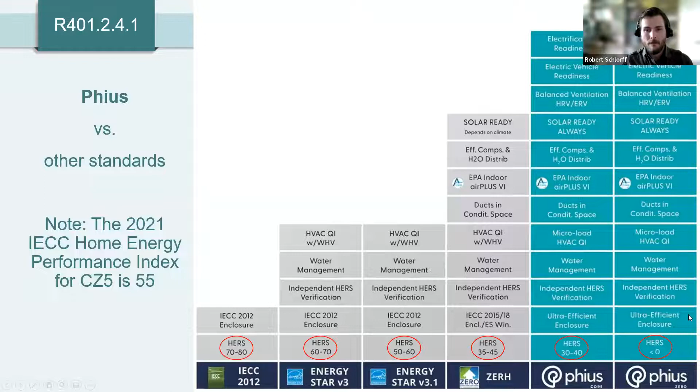Lastly, just to talk a bit more about this - the National Green Building Standard certification to comply with the Chicago Energy Transformation Code, your project can pursue either the gold or emerald level certifications. Either of those comply with the code completely. We also have a chart here, similar to the Passive House Institute chart, that shows National Green Building Standards certification efficiency improvement over a 1975 baseline in comparison with ASHRAE 90.1 commercial and the 2021 IECC residential. You can see it's quite a bit more efficient than the IECC residential, and it does lag a little behind the ASHRAE 90.1 commercial.

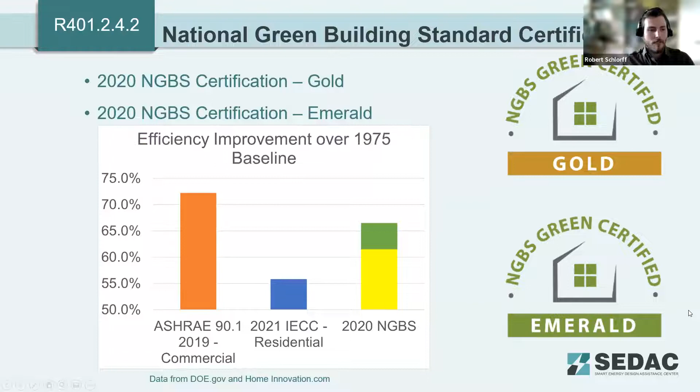At this point, I think we have our last poll question. The last two poll questions are: number one, which residential amendment to the Chicago Energy Transformation Code is the only potential weakening amendment? Your choices are vaulted ceiling insulation requirements, duct leakage testing exceptions, steel framed wall R-value adjustments, or local exhaust ventilation requirements. The second question is how much can whole house ventilation be reduced if supply air is sent to just the bedrooms? Your choices are: can't be reduced, must meet IRC/IMC ventilation requirements, 10%, 30%, or 50%.

Well, questions came in looking at the residential additional efficiency package options, where the transformation code requires 2 of those to be picked. The 2021 code requires 1. That does apply to new construction only - it does not apply to existing buildings.